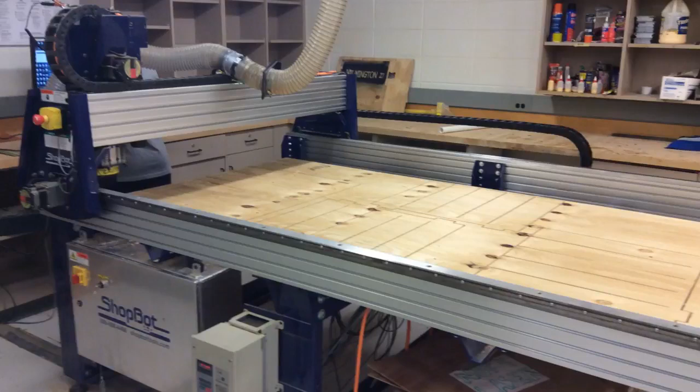I am Jack Kingham, and today I'm going to show you how to use the Vcarve software. Vcarve can be used to make files that can be printed out on the Shopbot, shown in this picture right here. First we have to open the Vcarve software, which is this application right here.

Now we're going to put our piece in, so don't click on create a new file, because then you'll have to draw your own piece right there in Vcarve. You want to open an existing file, and choose the PDF that you want to insert.

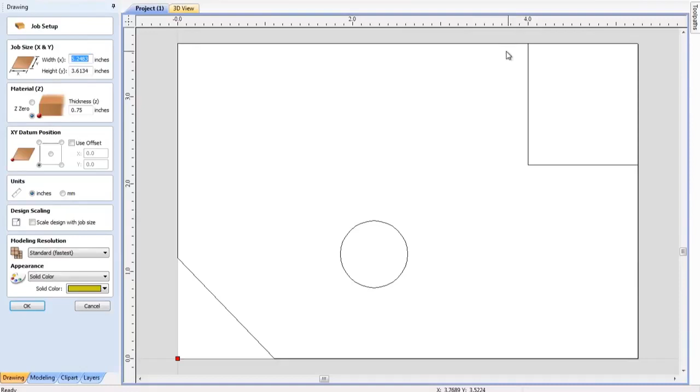Now that our piece is in Vcarve, we're going to want to set the page size, because as you can see right now, the page is only as big as the piece. So I'm going to set the width to, let's say, 15 inches, and the height to 10 inches.

And now we're going to have to set the thickness. It's important to set the thickness, because if it's too thick, it won't cut all the way through. And if it's too thin, then it will cut all the way through the board and into the table underneath of it.

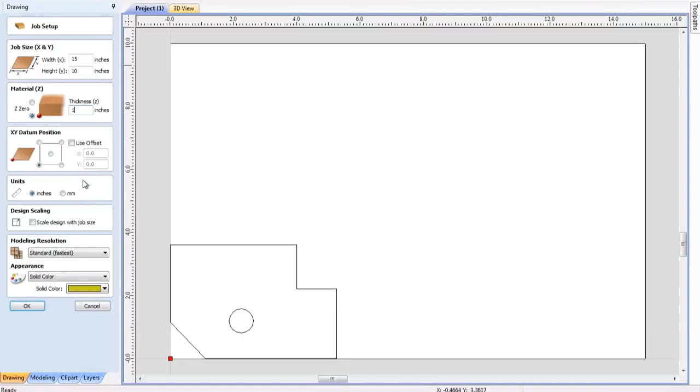So all you have to do is go and measure the thickness of your board. Let's say I'm just going to put in 1 inch for the thickness. And that's about it for setting the page dimensions, so I'm just going to go ahead and hit OK.

While setting the page dimensions, if you ever accidentally hit enter, then that window will go away. So you just click that little button in the upper left hand corner and that window will come back.

Now we're going to go over how to move the piece around. What you're going to want to do is highlight the entire piece, and go over here and click on this little button right here. Now you can move the piece around freely, so I'm just going to go ahead and throw it in the upper left-hand corner for now. That's really about it for moving the piece around.

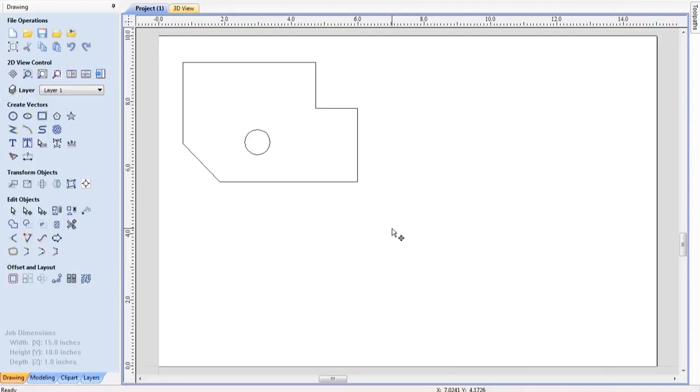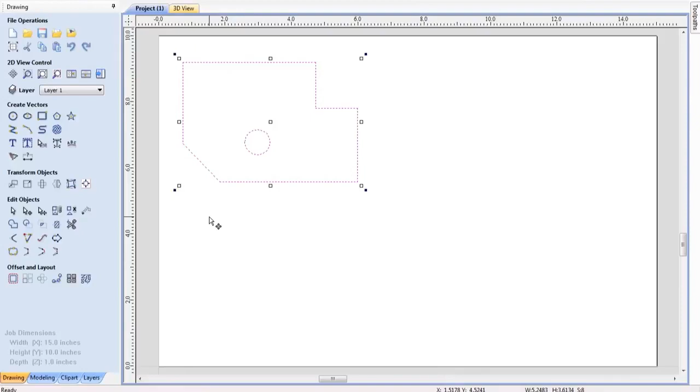So to join all the open vectors, what you're going to want to do is highlight the entire piece. Then over here in the bottom left, you're going to want to click on the button called Join Open Vectors. Go ahead and click on it, and you can see it says 1 closed and 7 open.

You don't want to mess with the tolerance or anything. It also shows you how many closed and open vectors there will be after joining. So you can just go ahead and hit join, and now all the vectors are closed.

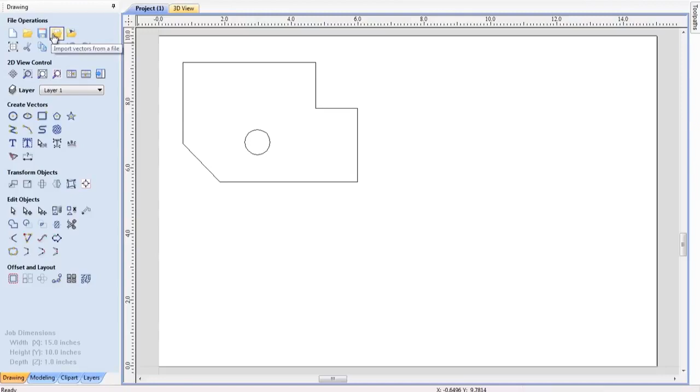Now let's say you want to put in a second piece. That's pretty simple. Just go to import vectors from a file, go ahead and click on that, and choose the piece you want to put in. I'm just going to put in the same thing twice, and go ahead and select the whole thing.

Go ahead and move it around. I'll just throw it right next to the other piece. Go close the vectors, and there you go. It's as simple as that.